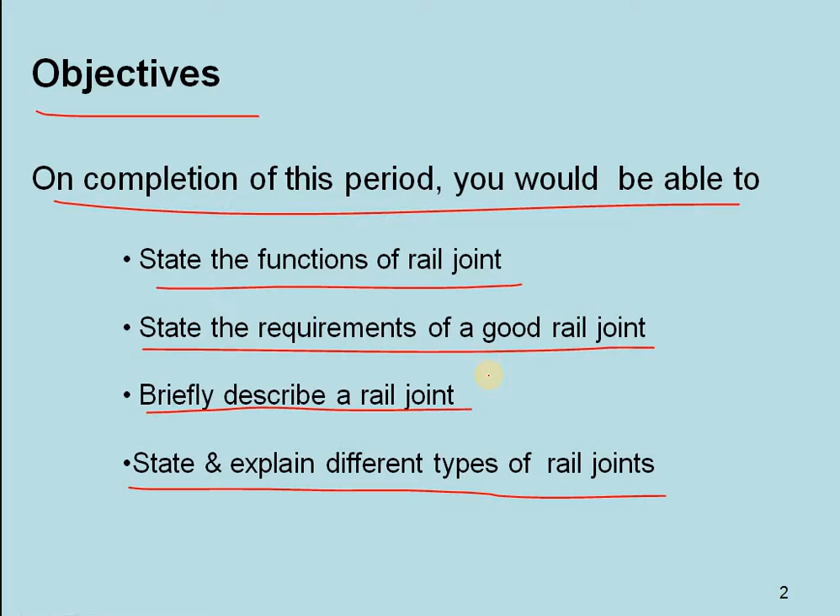Recap: in the previous class you have learned permanent way, parts of a permanent way, functions of components of permanent way, and different types of rails and their characteristics. These are the topics we have seen in the previous classes regarding the permanent way, their functions and components.

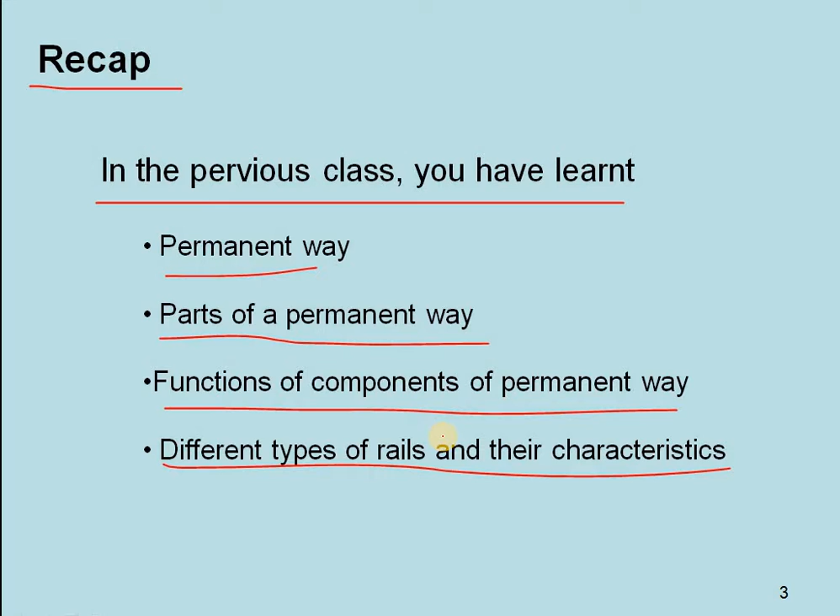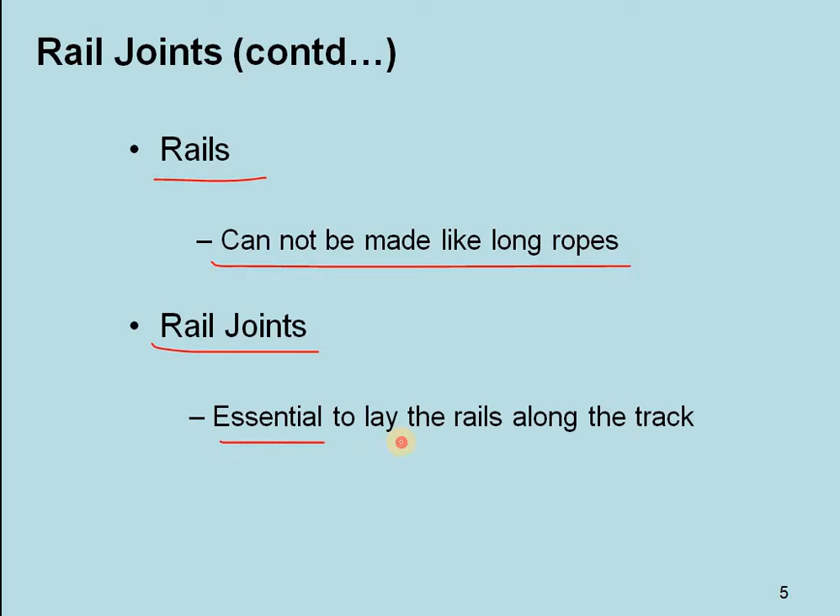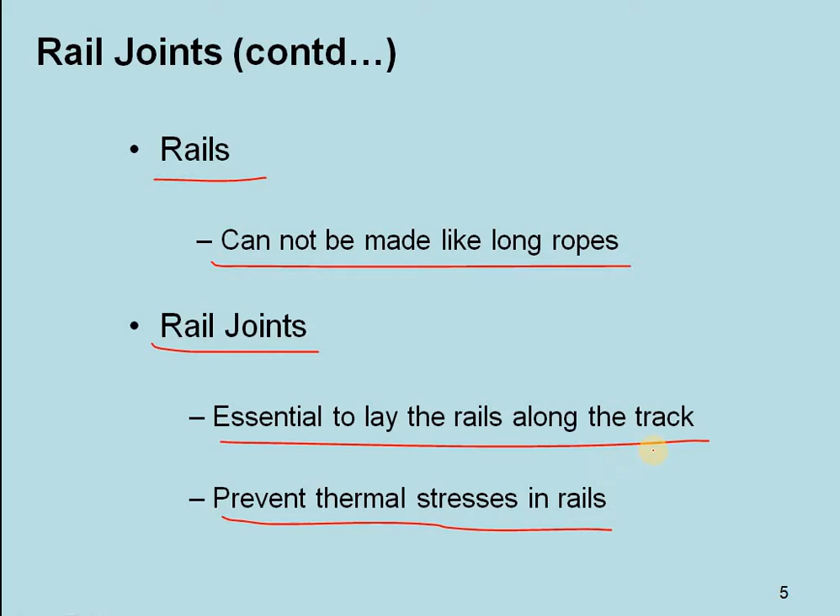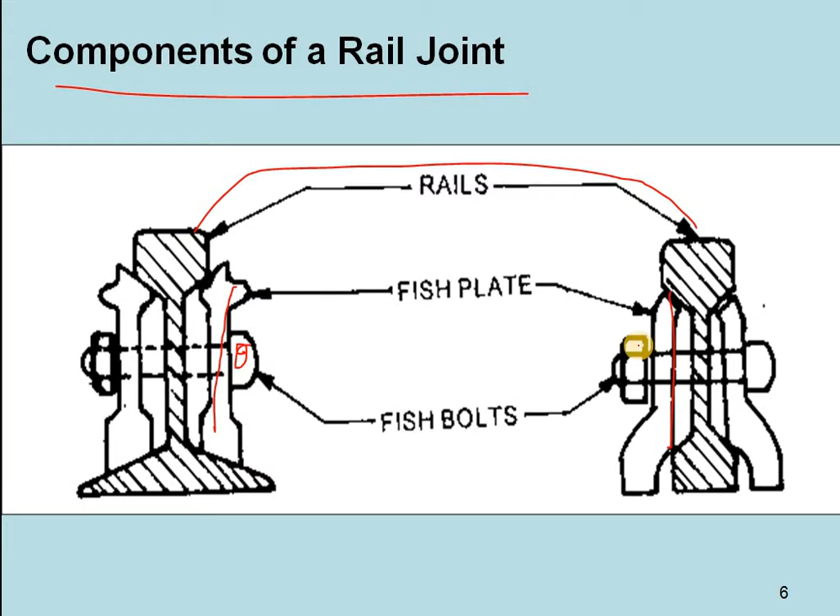Components of a rail joint: this is the top, we can see the rails, and these are the fish plates for the side supports connecting to the rails, and these are the fish bolts which are tightened with the bolts to the fish plate to fix and grip it. You can see here the rail top, and these are the nuts which will be tightened, and this is the fish plate for fixing of bolts, which we call fish bolts. This is the rail bottom, and this is the expansion joint where one rail meets another rail in the middle portion, and these are all fish bolts, and this is the fish plate which is connected with bolts. This we will call a rail joint.

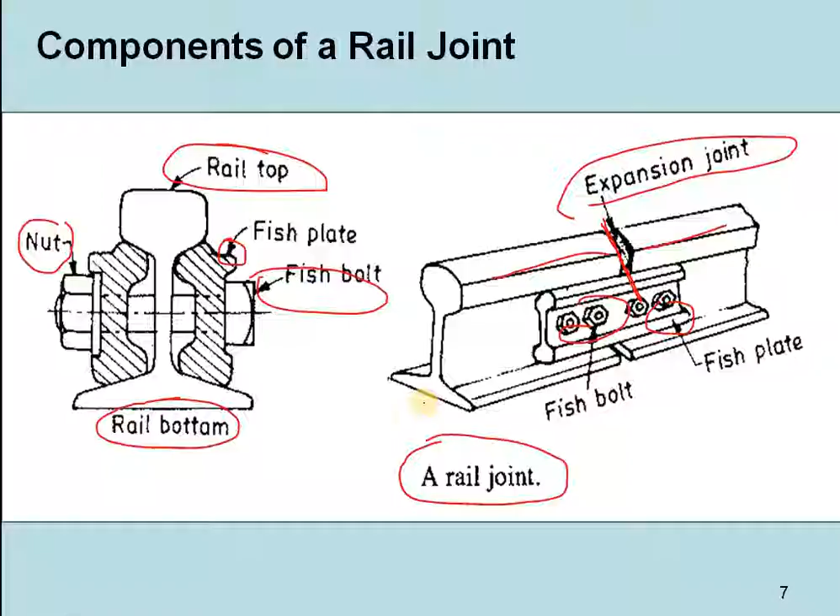So a rail joint has so many components. This is the actual diagram where you can see: this is a tie plate, and this is a dating nail, and these are bolts and nuts which are tightened, and this is a gap between the joint, which we call the expansion space. This is the running surface of the rail.

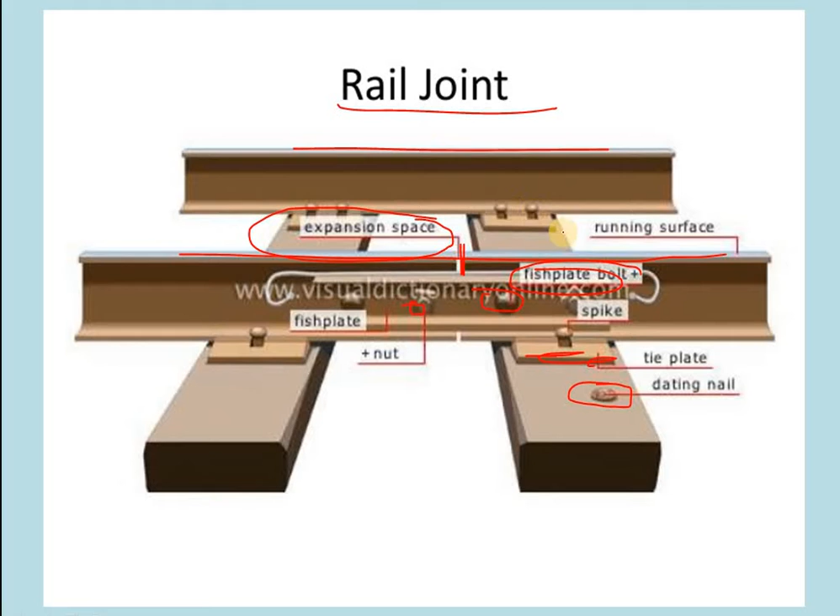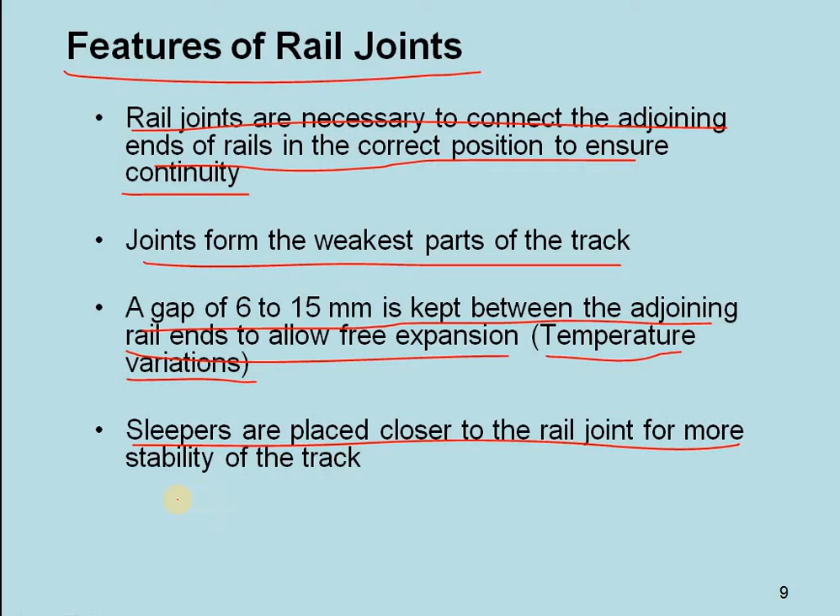Features of rail joints: rail joints are necessary to connect the adjoining ends of rails in the correct position to ensure continuity. Joints form the weakest parts of the track. A gap of 6 to 15 mm is kept between the adjoining rail ends to allow free expansion, depending upon temperature variations, and sleepers are placed closer to the rail joint for more stability of the track. These are the features of rail joints.

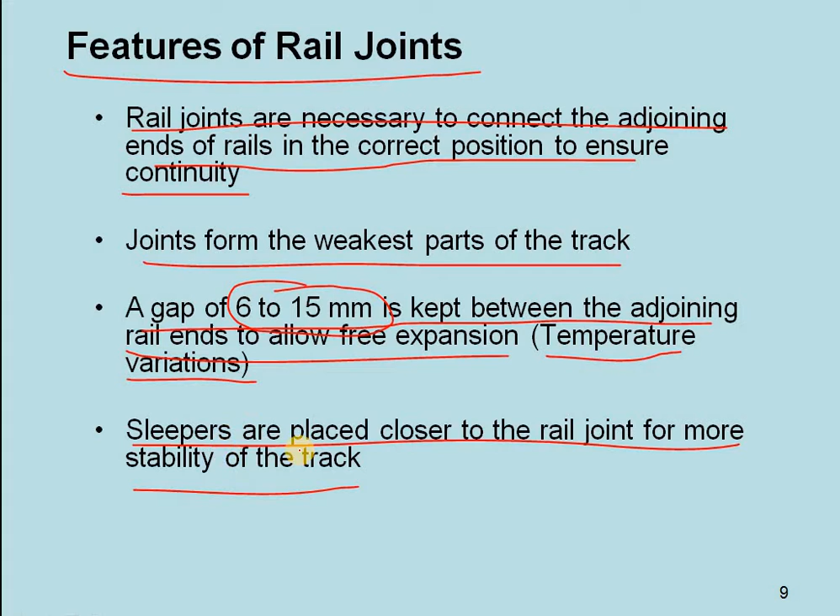So rail joints are necessary to connect the adjoining ends of rails in the correct position, and they form the weakest parts of the track. Nearly a 6 to 15 mm gap will be provided between the joint, allowing free expansion and contraction due to temperature variations, and sleepers are placed at the bottom near the rail joints.

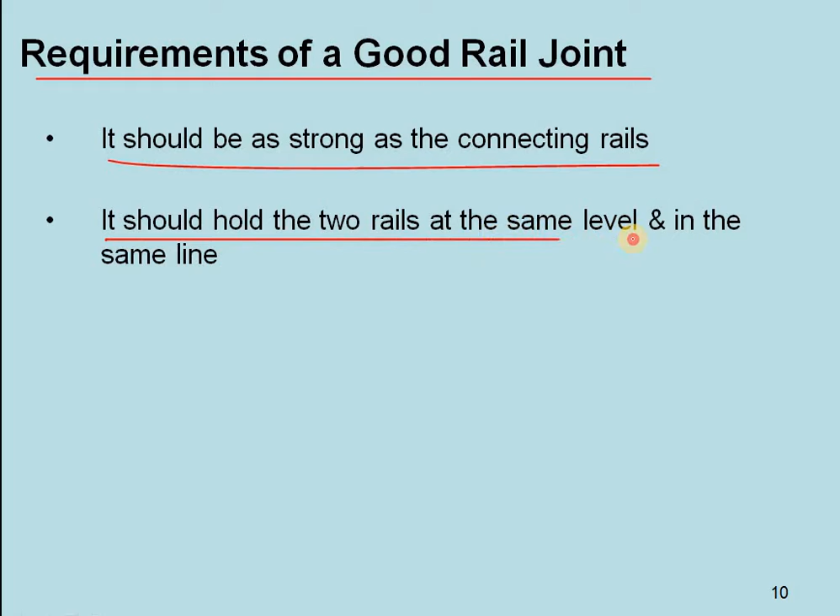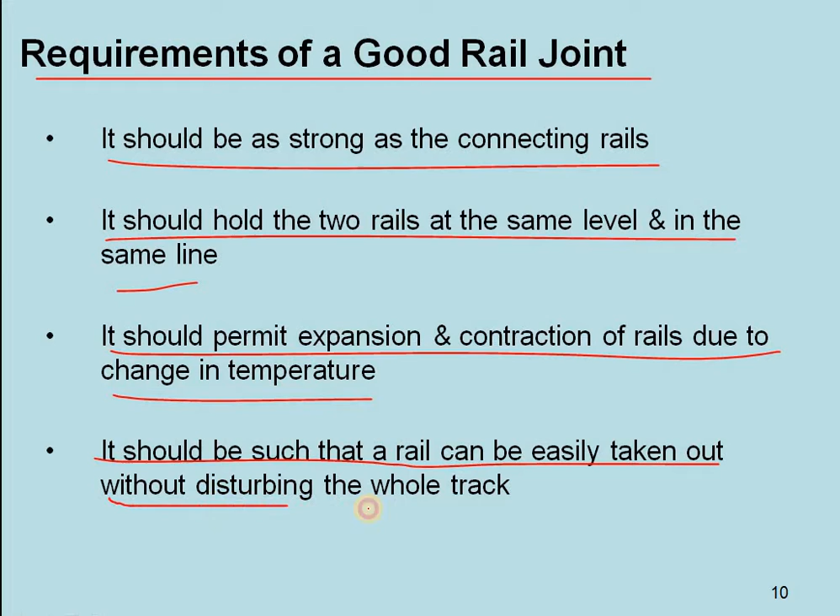Requirements of a good rail joint: it should be as strong as the connecting rails, it should be very durable, and it should hold the two rails at the same level and in the same line. It should permit expansion and contraction of rails due to change in temperature. It should be such that a rail can be easily taken out without disturbing the whole track. These are the requirements of a good rail joint, and it should adjust to the wear, and it should be cheap and durable.

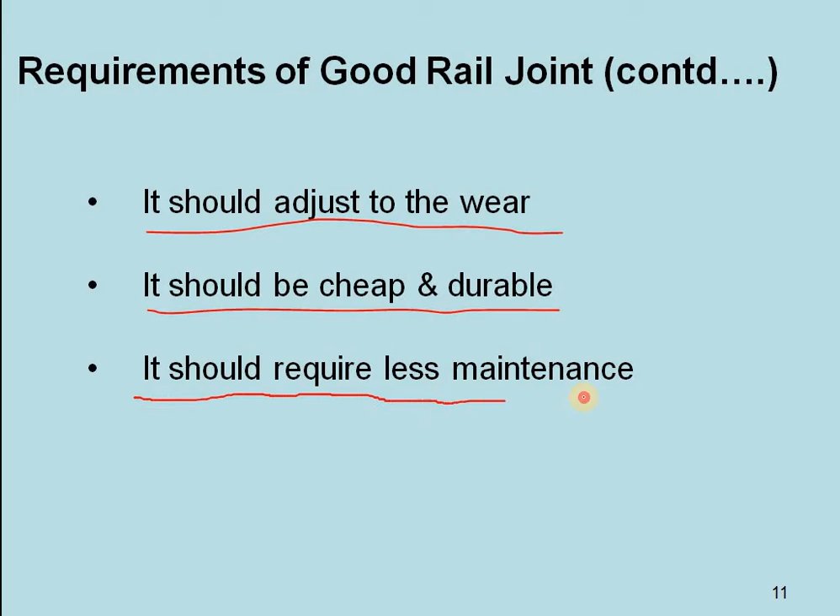It should require less maintenance and be difficult to dismantle by sabotage. It should withstand rough conditions and wear and tear, and it should be cheap and durable. So it should require less maintenance and should be easy to dismantle when needed.

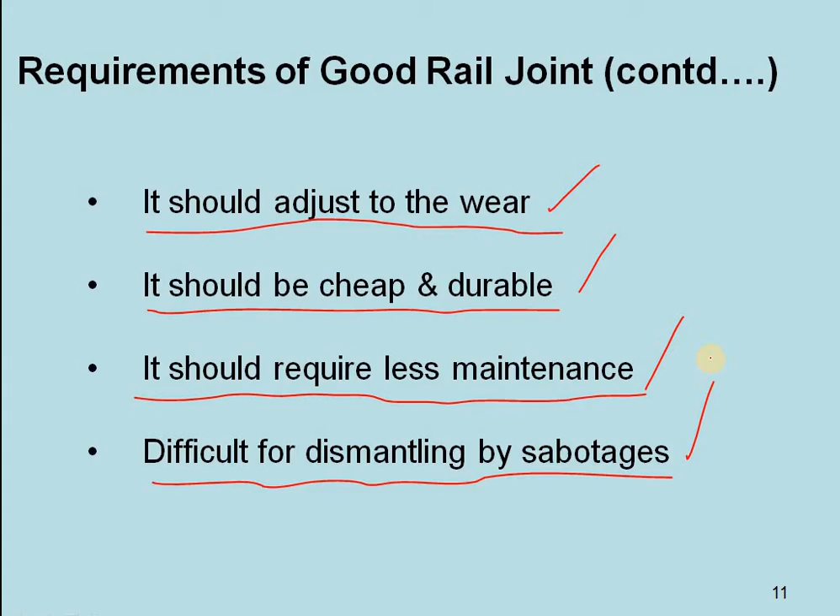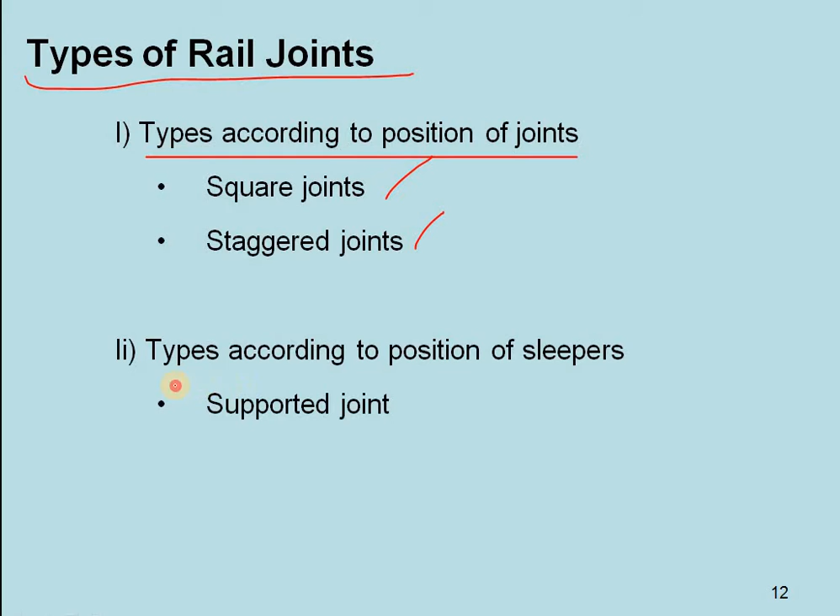So, types of rail joints. Types according to position of joints are square joints and staggered joints. Types according to position of sleepers are supported joint, suspended joint, and bridge joint.

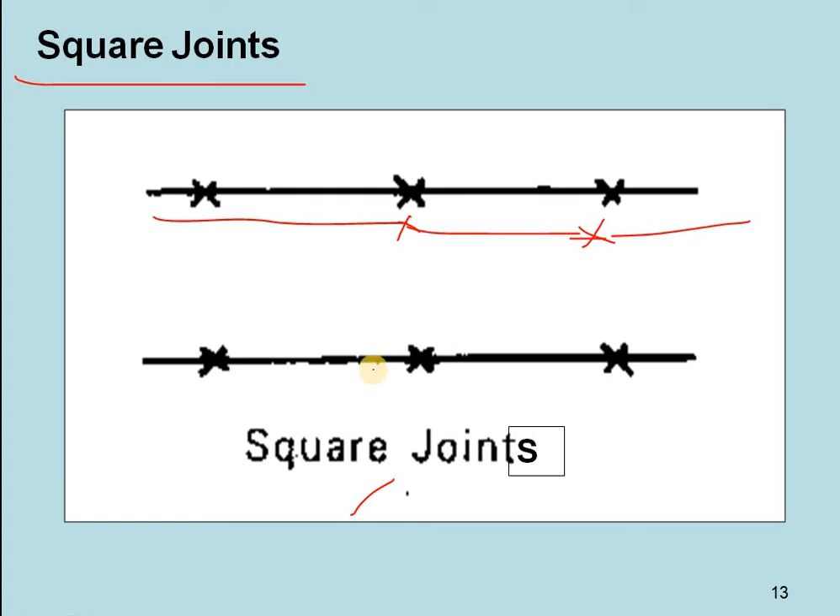So, square joints. These are the square joints you can see, the line which is connected. This is the actual diagram. These are the sleepers, this is the rail joint, and this is the expansion gap.

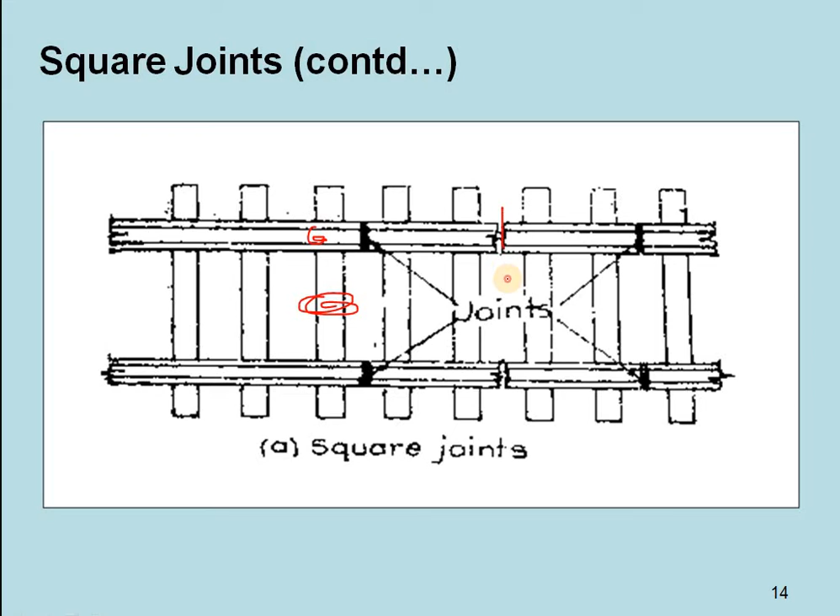When a joint in one rail is exactly opposite to the joint in the parallel rail, the joints are known as square joints. They are very common in straight tracks.

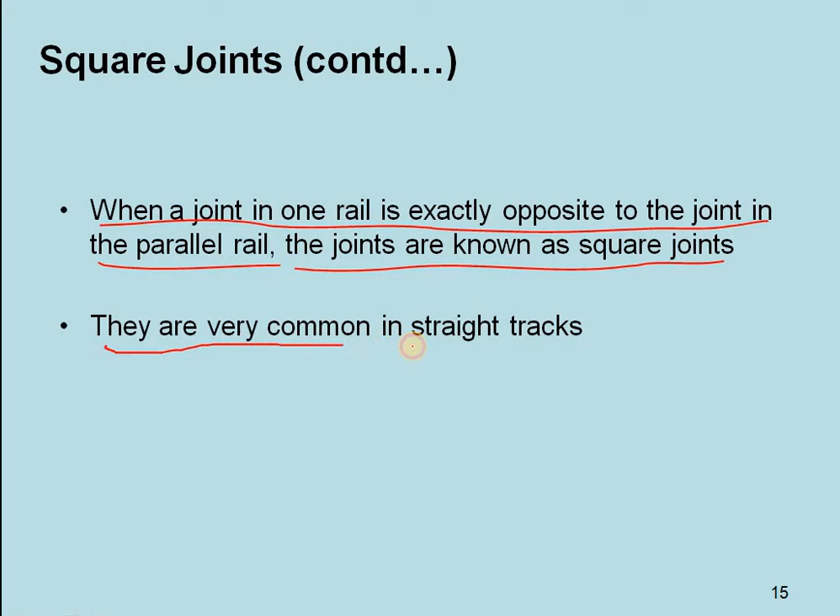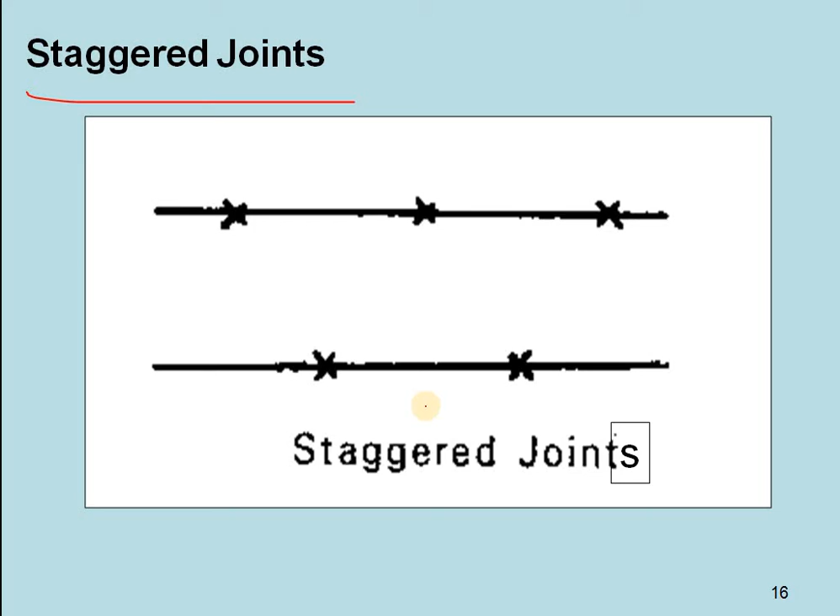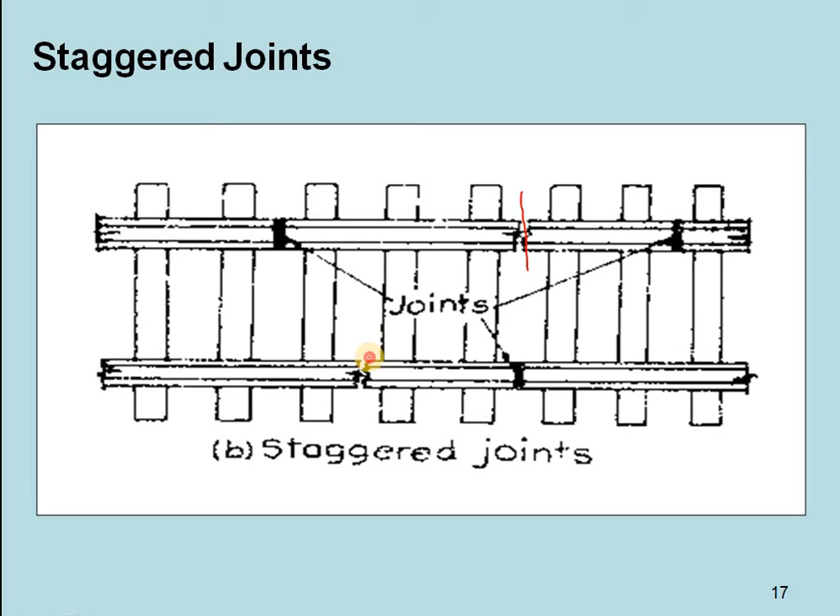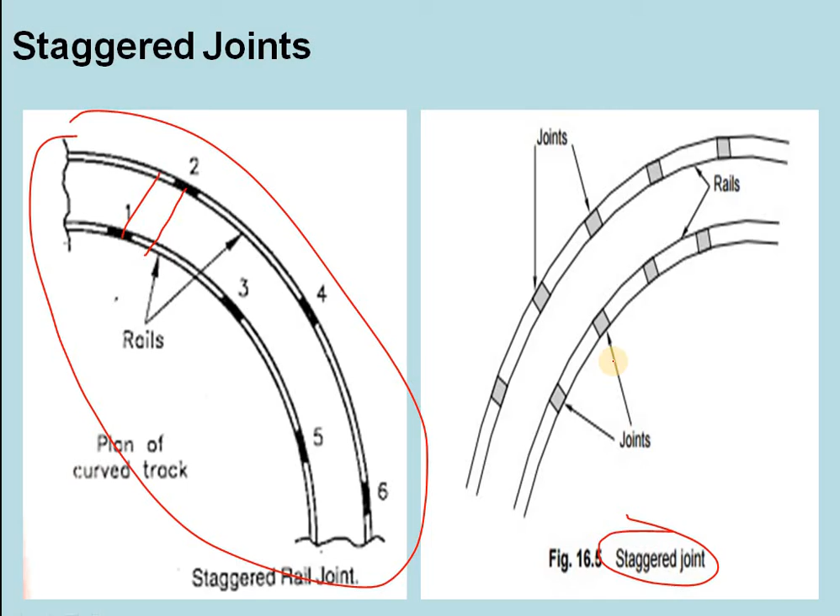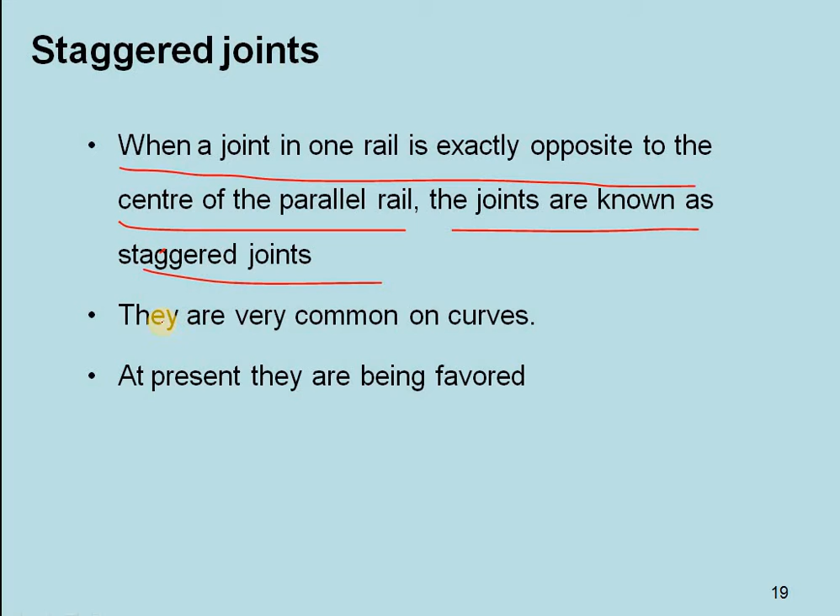When a joint in one rail is exactly opposite to the center of the parallel rail, the joints are known as staggered joints. They are very commonly used on curves and at present they are being favored. The number of sleepers required would be more.

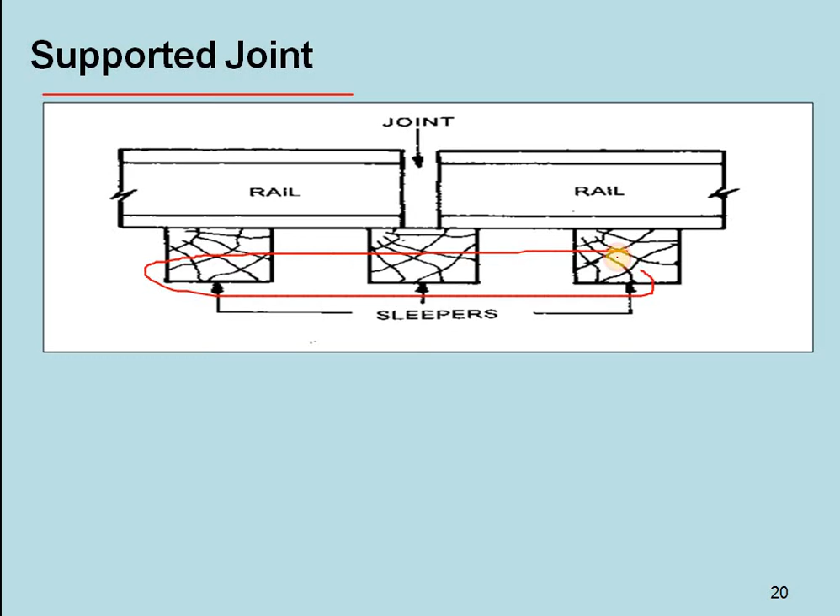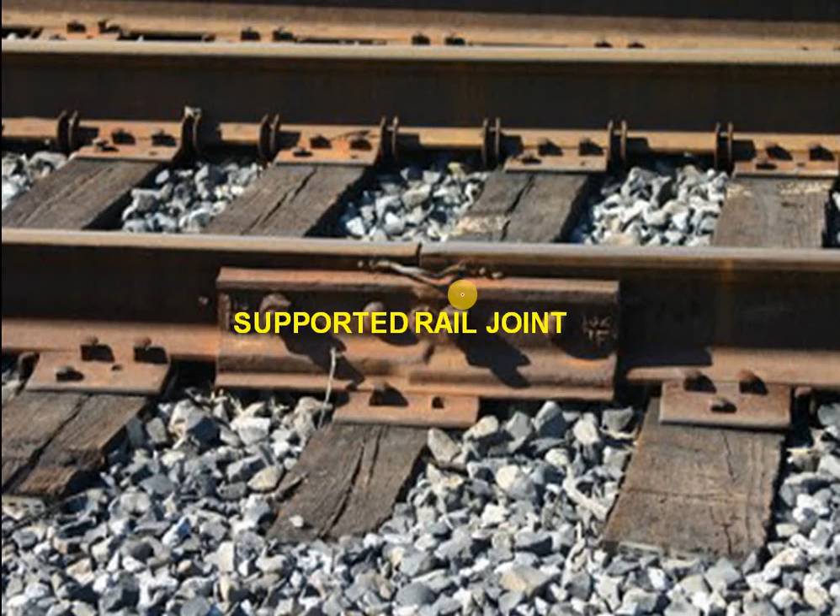Next one is supported joint. This is the supported joint. We can see the bottom one is the sleepers, and this is the gap. So these are nothing but supported joints, where we can see fixing with fish plates.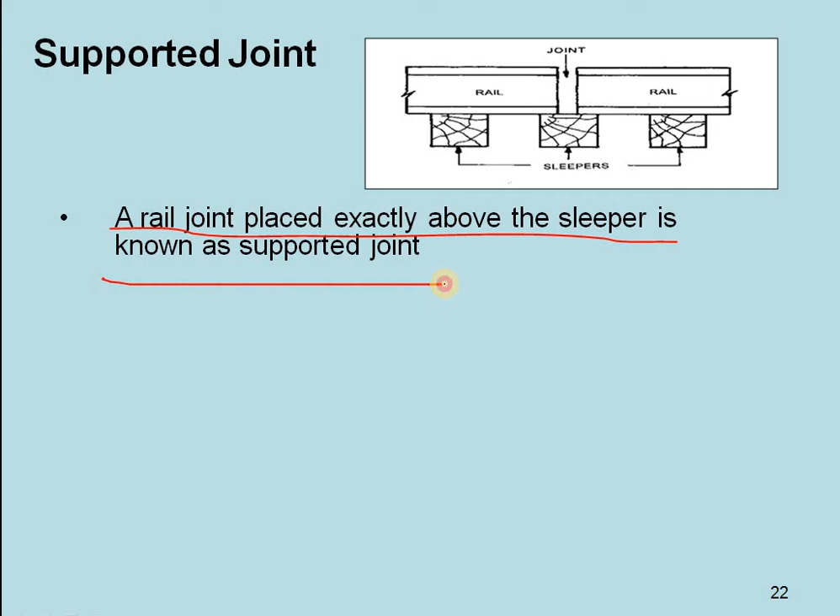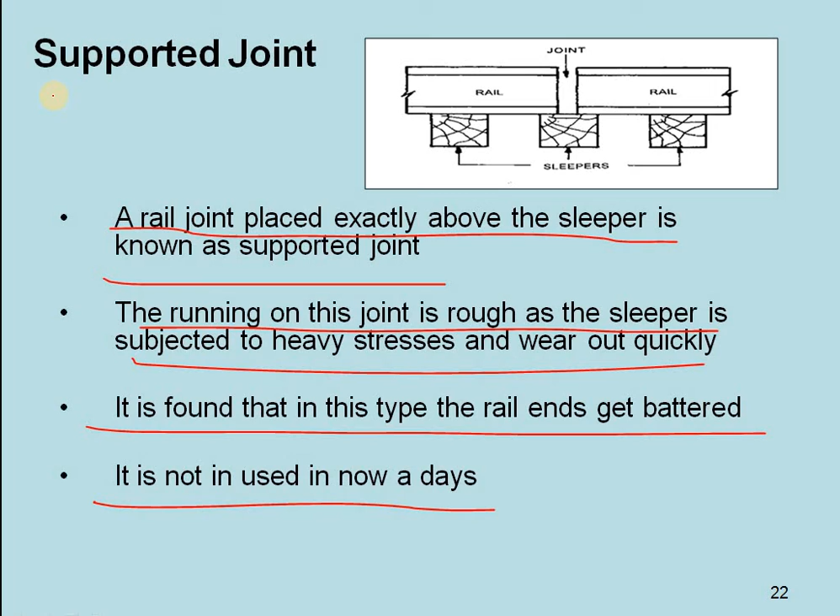A supported joint is a rail joint placed exactly above the sleeper. The running on this joint is rough as the sleeper is subjected to heavy stresses and wears out quickly. It is found that in this type the rail ends get battered. It is not used nowadays; these joints were used previously.

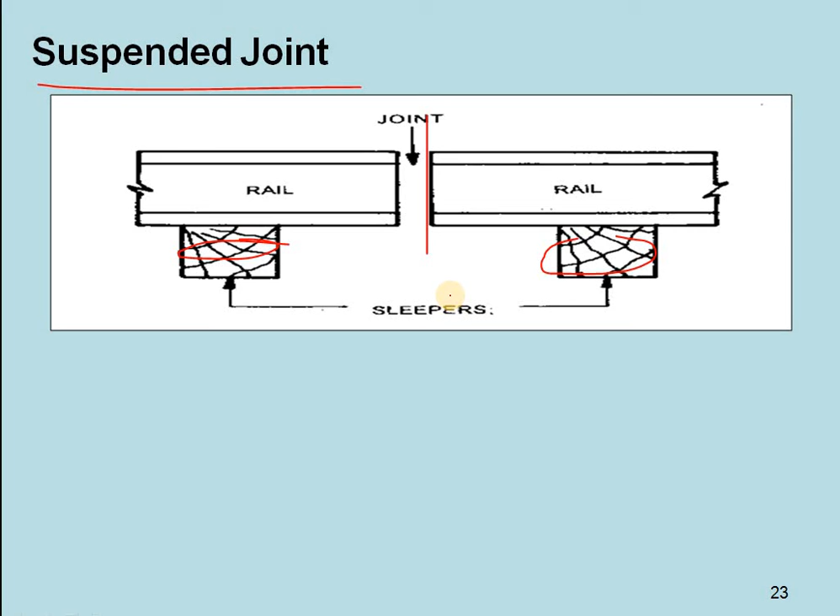Next one is suspended joint. Two sleepers with the joint between their centers is nothing but a suspended joint. So this will be in this type of condition - these are the suspended joints, located between the center portion of two sleepers.

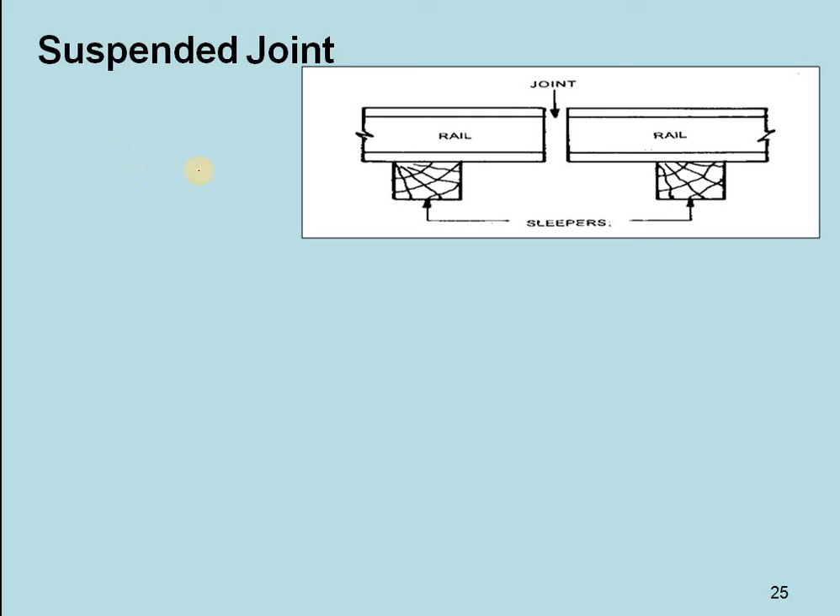A rail joint placed at the center of two consecutive sleepers is known as a suspended joint. In this case, the stresses transferred to sleepers get distributed, so it is commonly adopted at present.

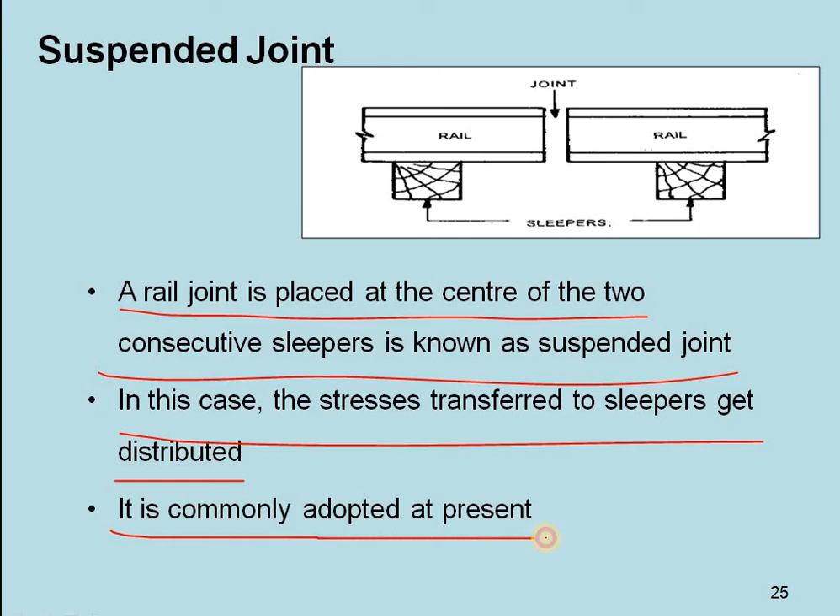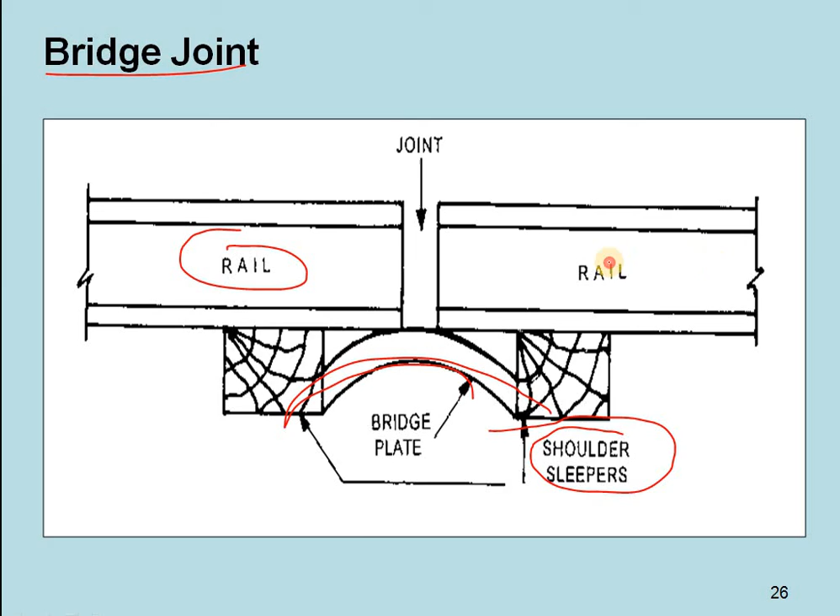Bridge joint. You can see under the bridge, this is a bridge plate. These are the shoulder sleepers, and this is the rail. So this is the bridge joint, and this is the bridge plate we can see. These types of joints are connected very rarely.

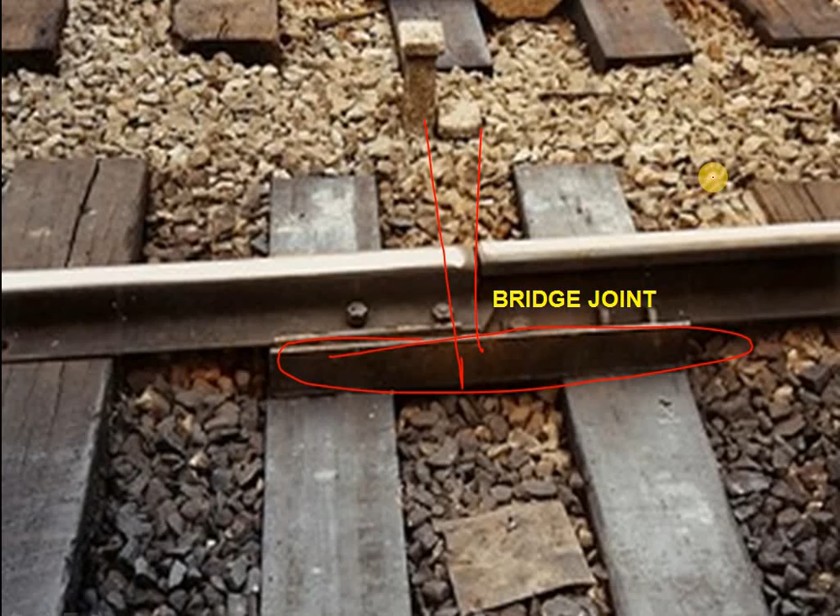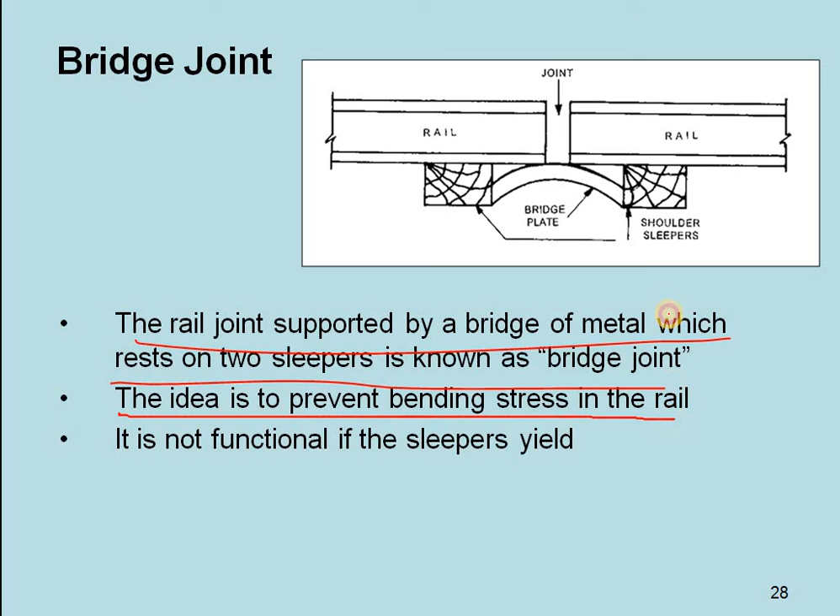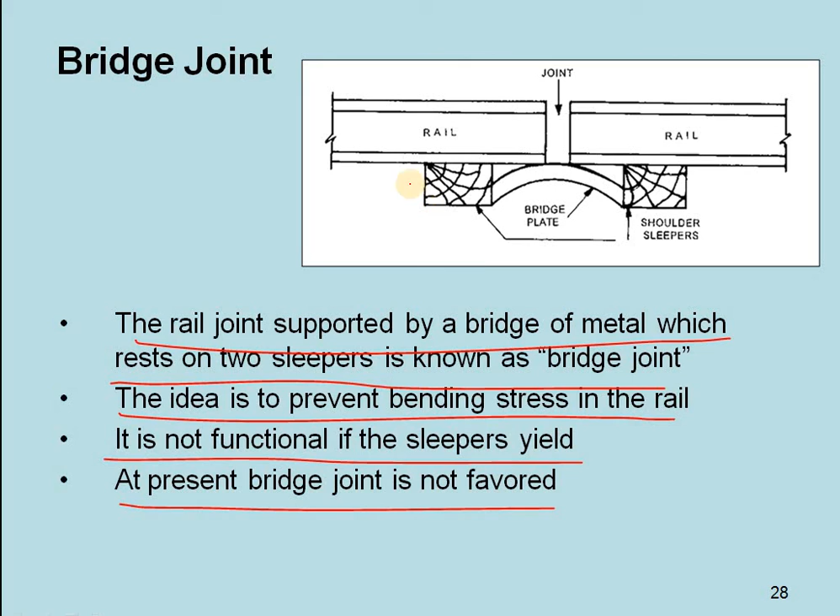The rail joint supported by a bridge of metal which rests on two sleepers is known as a bridge joint. The idea is to prevent bending stresses in the rail. It is not functional if the sleepers yield, so at present, bridge joints are not favored or preferred.

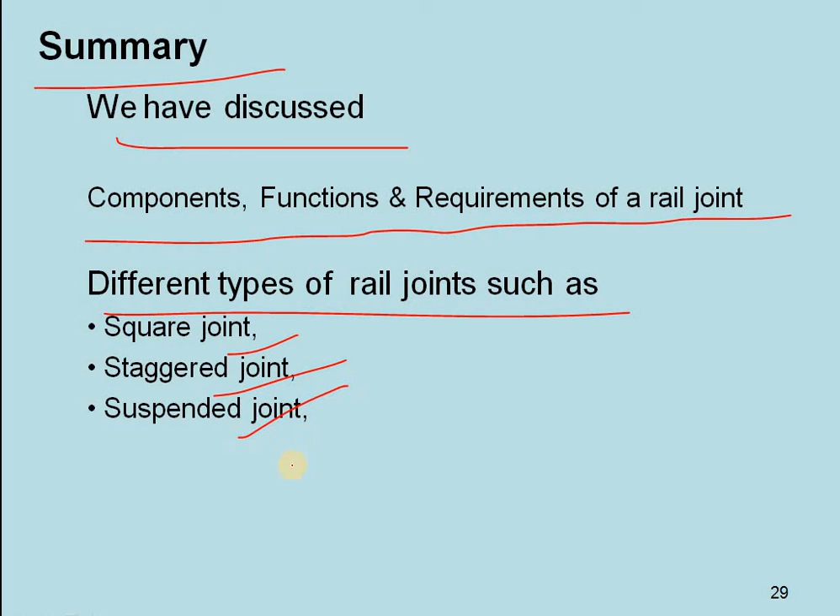So finally, summary: we have discussed the components, functions and requirements of rail joints, and different types of rail joints such as square, staggered, suspended, supported and bridge joint.

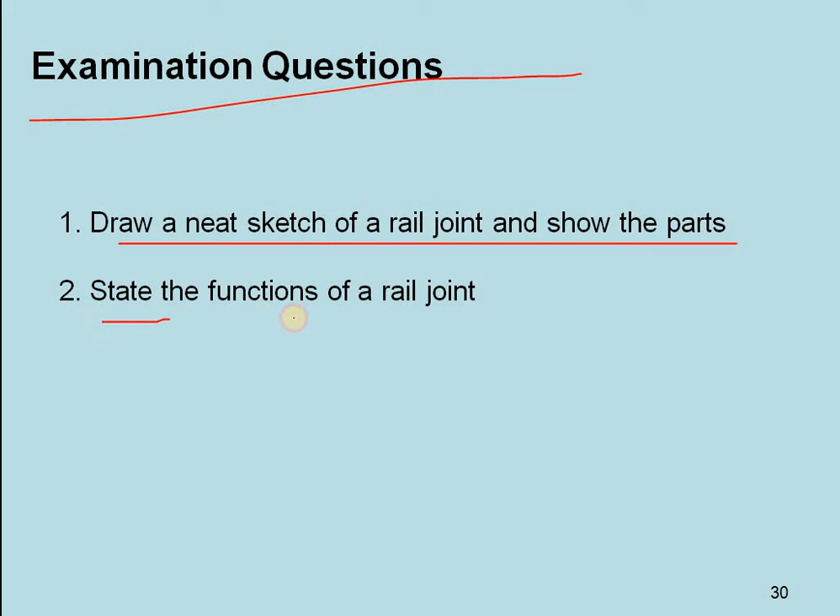Your examination questions are: draw a neat sketch of a rail joint and show the parts. State the functions of a rail joint. State the types of rail joints and draw sketches for any two.